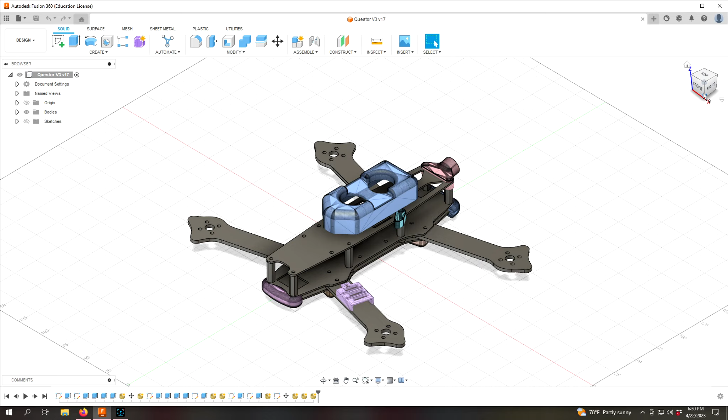Okay, what up YouTube? In this video, I'm gonna hopefully show the process of going from Fusion 360 to actually milling out carbon fiber using a CNC machine.

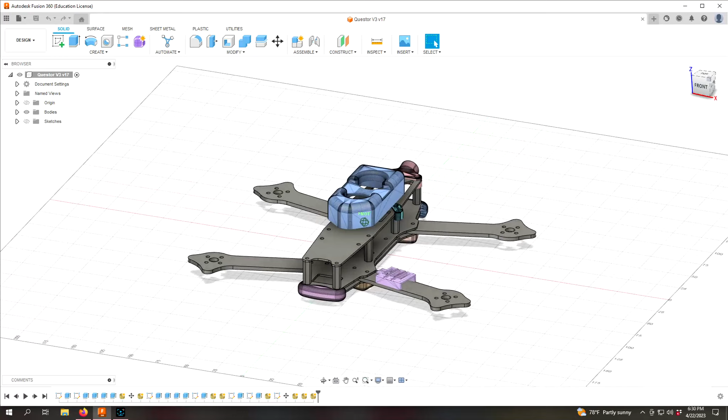This video is mainly gonna be a reference for me because it seems like I don't mess with my CNC machine enough to remember how to do things. So I'm hoping I can document everything in this video and reference it later when I go to machine something out, and hopefully it'll help other people too.

There really isn't too many videos showing the complete process. So right here I'm in Fusion 360 and I have my model that I made of my Questor frame, and I'm calling this version 3.

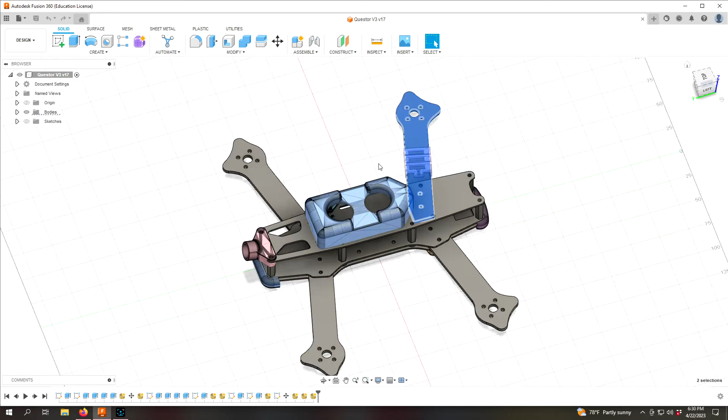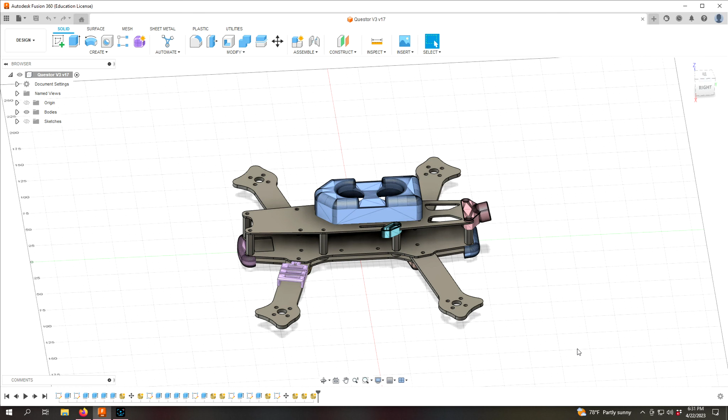Version 1 I never made, version 2 I made, and today I lost it in a pond, and I was planning on making another one, but I pretty much don't have a choice now. I had to make another one. I did make some changes to make it a little more reliable, just minor changes.

I'm still experimenting with the hole tolerances. Truth is, it's been a while since I finished this model, I even forget what I settled on for the hole tolerances. But yeah, still kind of working through that process.

On the top plate here, I cut this design in the back. I don't know if I'm going to regret that or not. The other Questor frame I made had a solid top plate, but I figured I'll cut it, and if I break it, I'll know that's too weak of a point, and I'll make the next one solid.

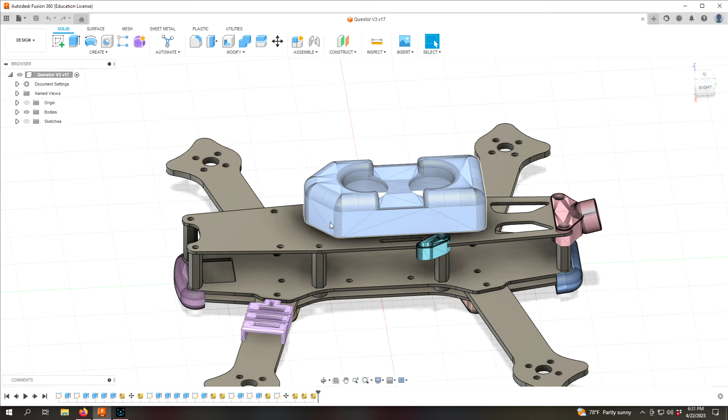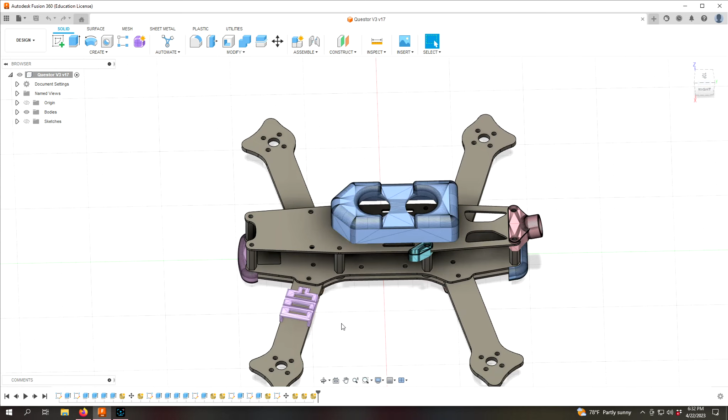My workflow in Fusion 360 is really bad, maybe someone can comment a better workflow. The weird part about this whole process is, even though I had the model in Fusion 360, it seems like the only way I know how to do it is to export it and then re-import it in order to mill it. So let's go ahead and get right into it.

The first thing we're going to do is the top and bottom plates. So I'm going to click the top plate here, and I have my bodies all labeled. So if I go... where is it at?

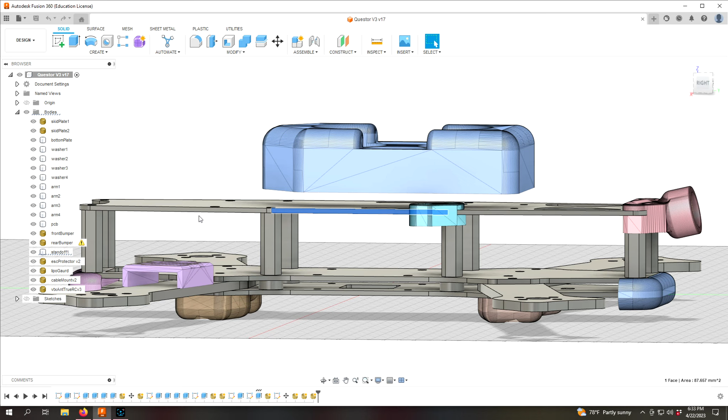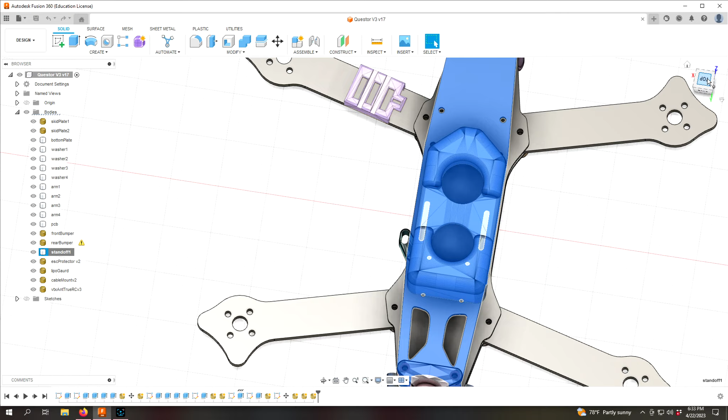Oh, I messed that up. So I messed this model up. Somehow I combined all the standoffs to the top plate. Let's see if I can do this without that. You see, I already messed up my model. Let's see. Somehow combined all the standoffs together. I wonder at what part did I do that. But I think I can still get the contour of the top plate.

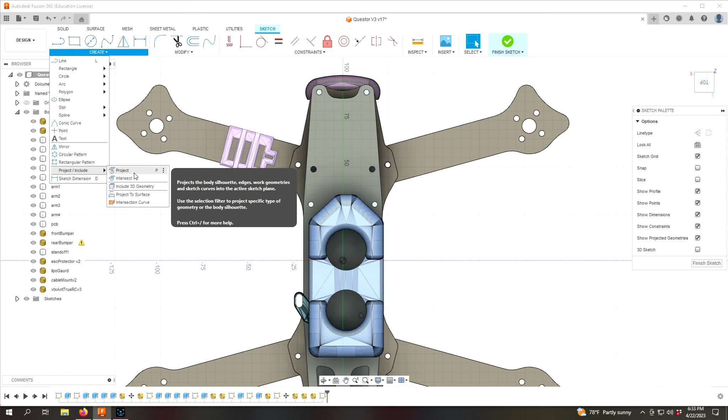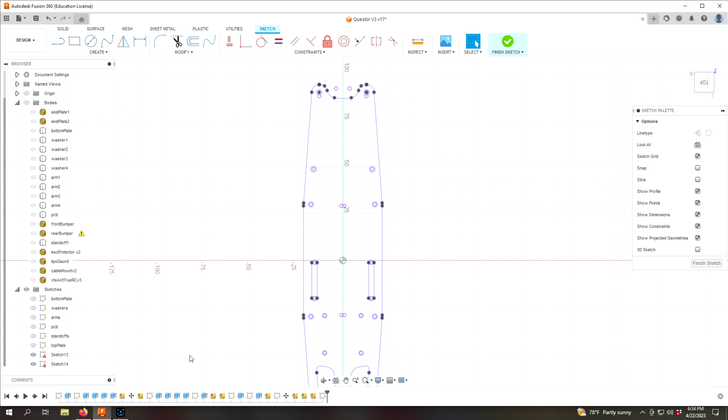Let me do this: create sketch. Then create, project, include, project, click on the top plate, and click OK. Then when we go down to sketches and take everything off... there we go. So now we have a sketch of just the top plate.

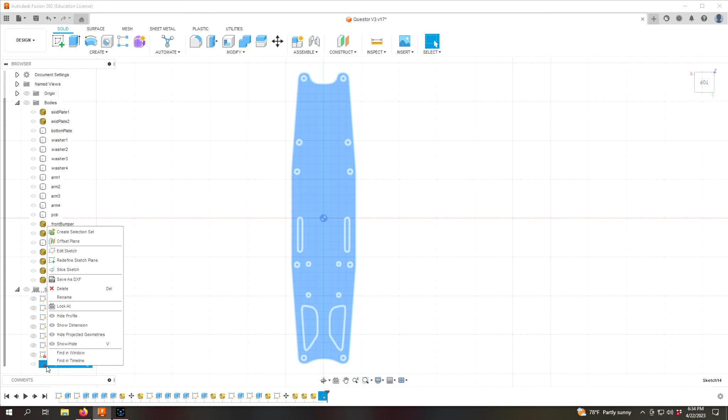So we hit finish sketch, and I'm going to rename it top plate for milling. Then I'm going to click on the sketch and save it as DXF: Questor version 3 top plate for milling.

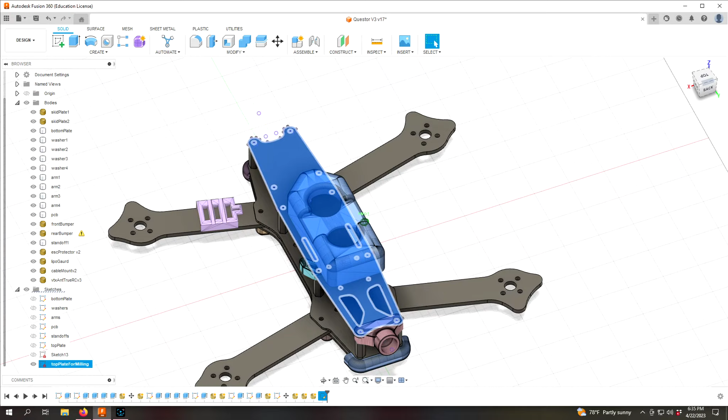And then I'm going to do the same thing for the bottom plate. So if I click this - oh, that's PCB, I'm going to get all messed up. So hide that, click that. That should come up as bottom plate. Yep, so click that bottom plate.

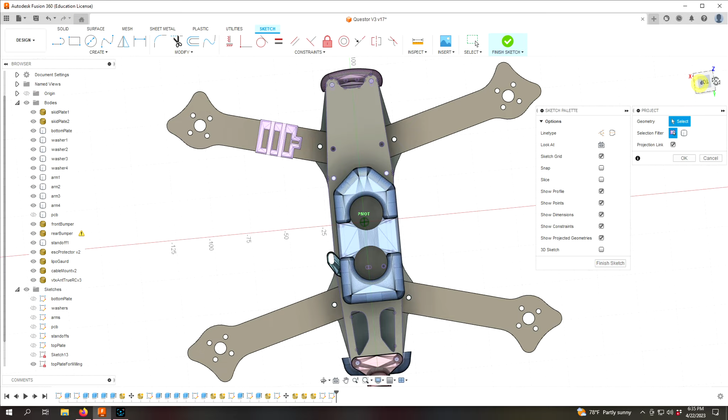Click create sketch. The reason I need to, even though I have sketches labeled bottom plate, is when they're in 3D form, sometimes you end up modifying the contour of it, so you can't trust that. So we're going to do the same thing, a new sketch on the bottom plate. I'll click the bottom plate and project that onto the sketch.

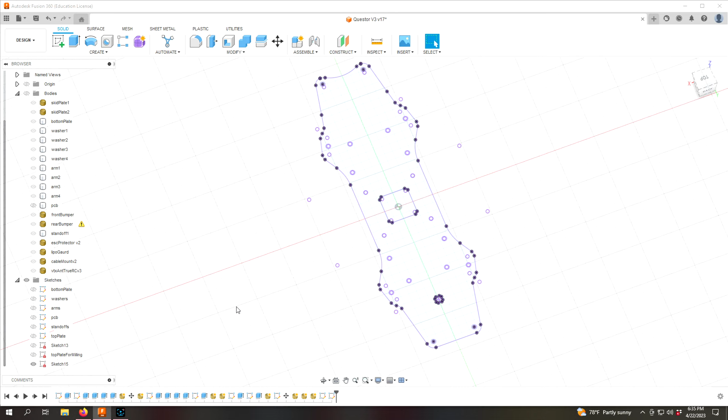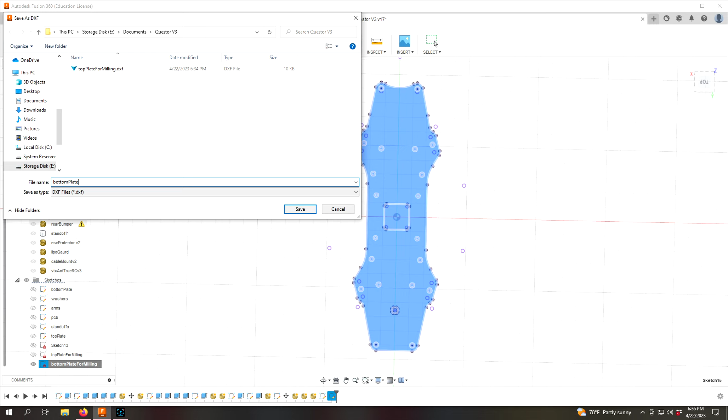And then if I cancel everything out and hit finish sketch, and hide everything except for that - there we go, we have the bottom plate for milling. So I'm going to rename that, rename bottom plate for milling, and we're going to export that as DXF, bottom plate for milling. Like I said, my workflow in Fusion 360 is not the best.

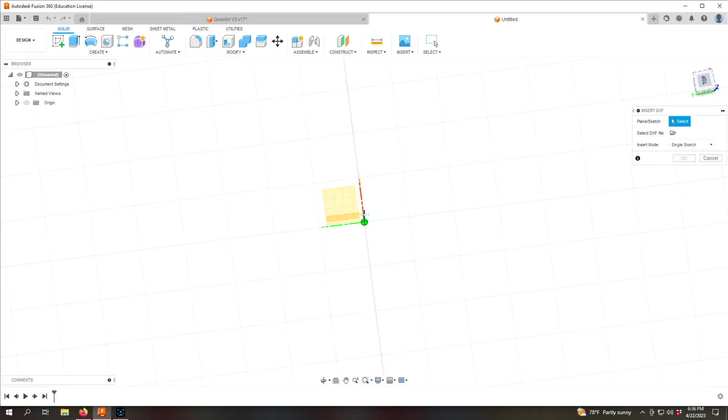Okay, once we save that, we're going to create a new design, and what we want to do is insert those DXFs. So we want to insert it - what's a good plane? I got my planes all mixed up. Right there, top. So we want to insert it onto that plane, DXF file, bottom plate for milling.

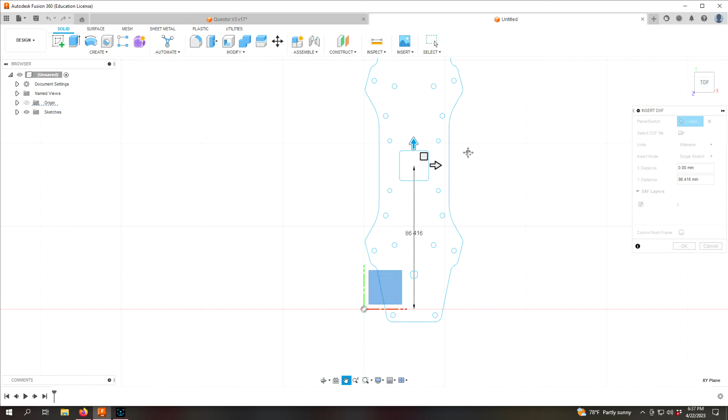And then what I'm going to do is just keep it in the positive axis, just like that. Okay, and we're going to do the same thing.

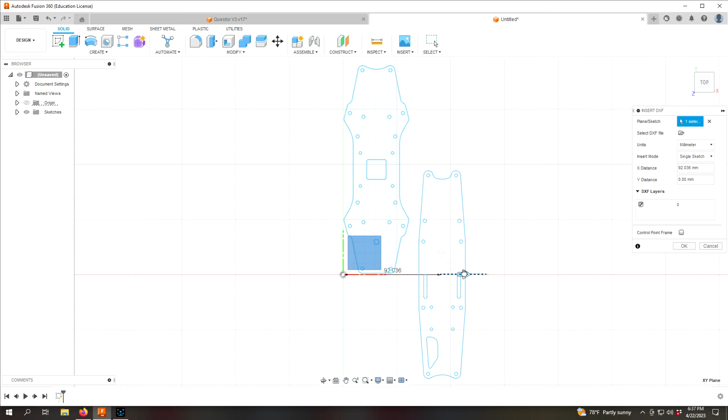We're going to insert DXF, we're going to do top plate for milling. And we're going to do the same thing, go up here. How close can we get them together? We want to make sure we got 2 millimeters in here, we'll do inspect, because the bit I'm using is going to be a 2 millimeter bit.

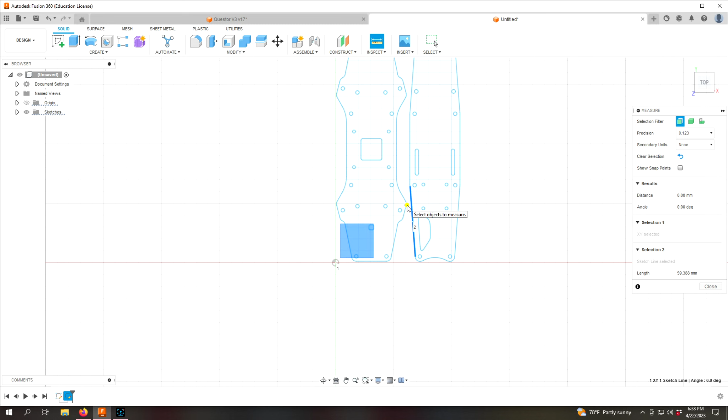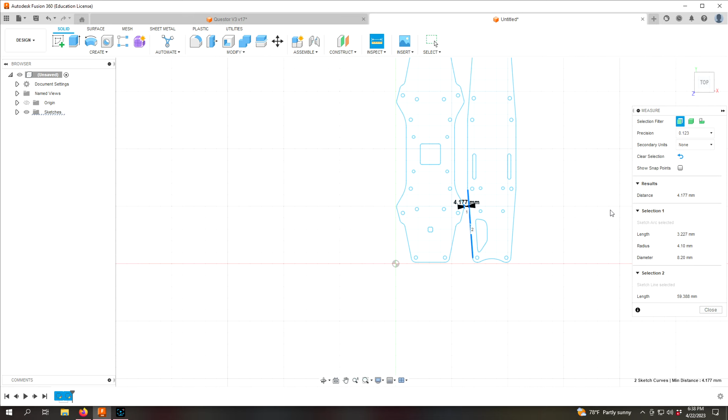How do you do inspect? That's 4 millimeters. Okay, so that's plenty. We can actually move it closer too. Should we move it closer? Try to save some. Oh, too late now, huh? Okay, well that's good. I don't care about wasting material.

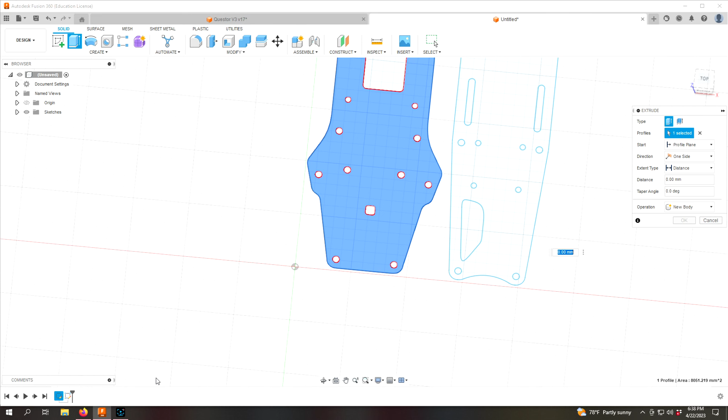Okay, and then just to make things a little easier, I'm going to extrude both of these. Uh-oh, we lost the... Let's go here. Okay, so we're back. I don't know what that was all about. I ended up having to modify the file after I brought it in. It has something to do with, I created this using the one side using a mirror effect, and when you do that, apparently it doesn't like saving it to a DXF, but I have no way of explaining that.

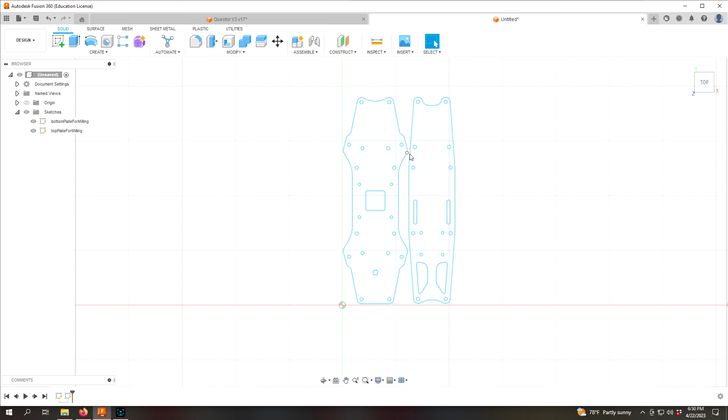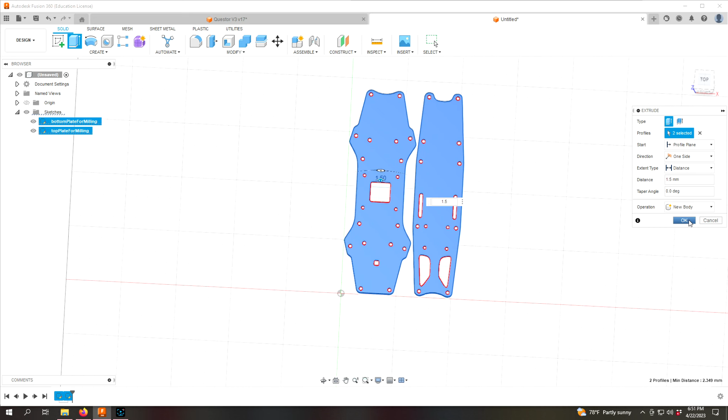So anyway, I have this set up with the bottom plate and top plate next to each other, and I actually made it so that they're 2.5 millimeters apart. So that should be good. The milling bit is 2 millimeters, the one that I'm using. So what I'm going to do now is I'm going to select both of them, and I'm just going to extrude 1.5 millimeters, which is the thickness of the material. So I have this model by itself with both plates side by side, 1.5 millimeters tall.

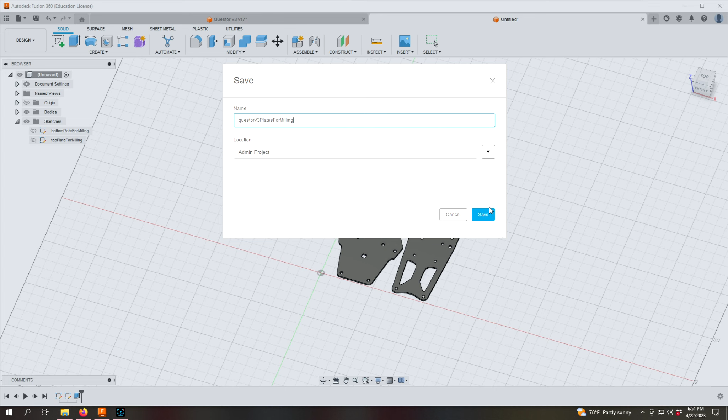Okay, so once we're done with that, let me go ahead and save this. We're going to call it Questor V3 plates for milling. Okay, we're going to hit save. Okay, what we're going to do is we're going to switch from design to manufacture, and we're going to set up, create a new setup, and for machine,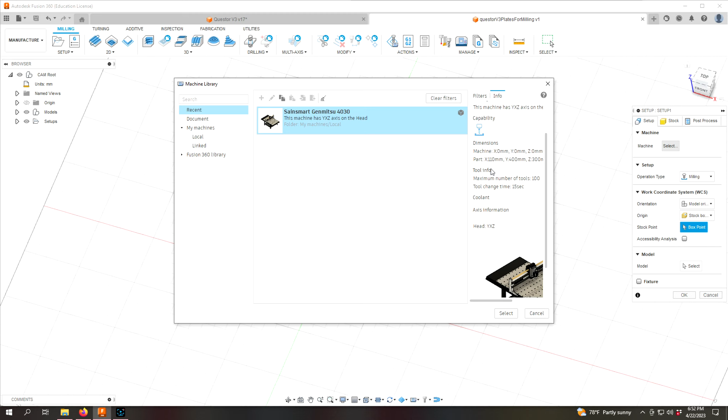I already made this machine, and just to document the information on the machine. It wasn't that hard to input. I think I just selected a generic machine, YXZ axis. I put in the build size, 110, 400 by 300. So the X, Y, and Z is messed up, but apparently this works. So I don't know how I set that up. Okay.

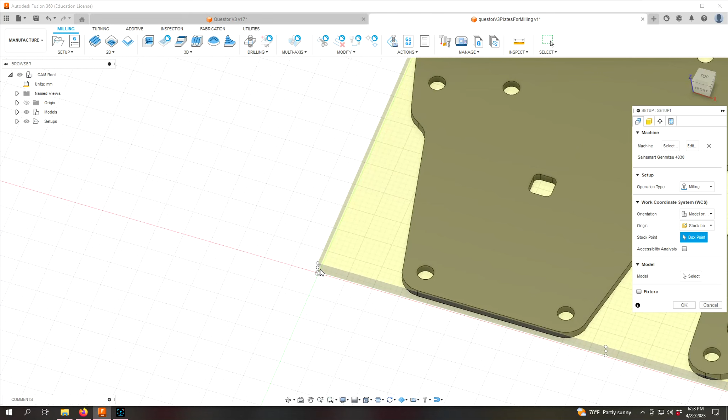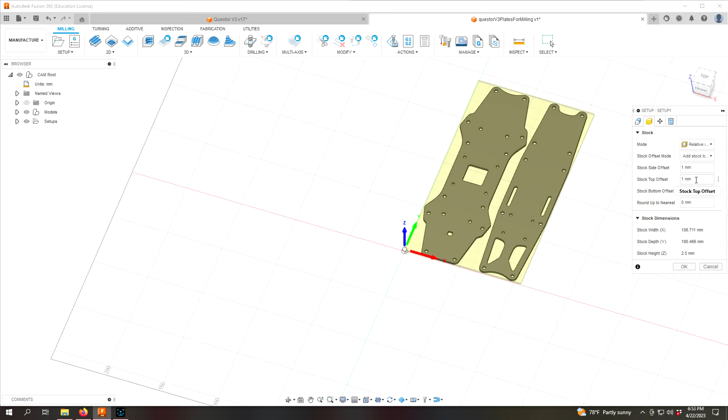So we selected the machine. It loaded the machine, operation type milling, orientation, model orientation, origin. So this homing origin, we want to put it in this corner. So that's going to be our 0 origin. And for the material, I just put it to relative mode. Side and top offset.

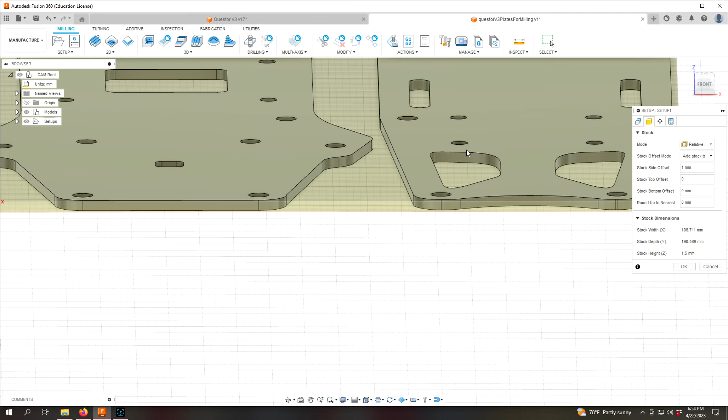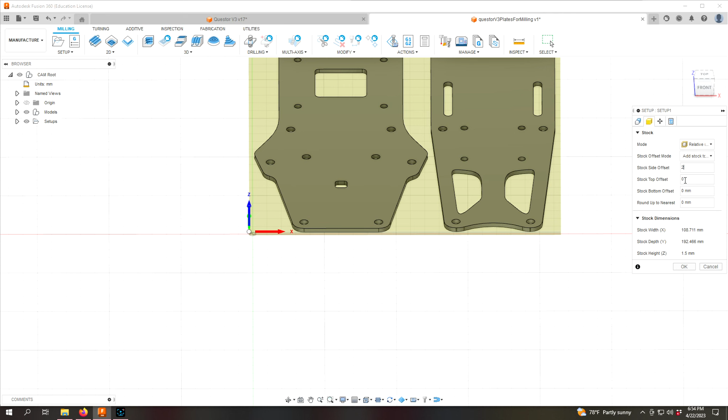We want to get rid of that because side offset is fine for 1 millimeter, but top is really what matters. We want it to be the same thickness, since we know that we're cutting 1.5 millimeter stock. But yeah, having this 1 millimeter, all that's going to do is bring the cutting in 1 millimeter. And actually, maybe I'll do 2 since my bit is 2 millimeters wide. But definitely the top and bottom offset we want 0. And then I think everything else is going to be good.

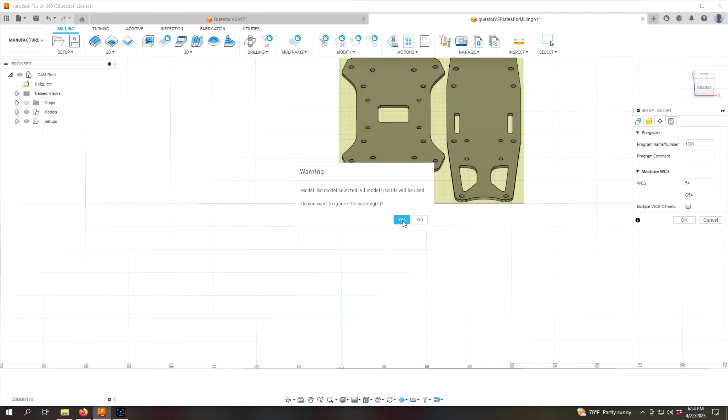Oh yeah, somebody online said that this matters, but I think I might have already inputted it on the machine setup. So we're going to hit OK. Okay. And now we're set up. So once we have it set up, we want to go to 2D contour. Okay, so for tool, we want a local library. I already set up, this is my bit. Now can I edit this?

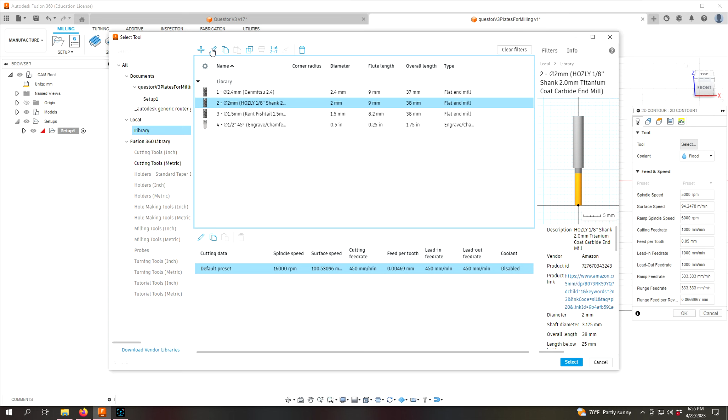Yeah, so I got these bits off of Amazon. They're 2 millimeter, 1/8 inch shank, and I just put the description in there. I already have this all set up. You want to go through this. Okay, so feed rates. So I got my bits and my feed rates.

I consulted Pat Regan. I'll link his YouTube channel in the description. He has a blog post about cutting carbon fiber, and that's why I reached out to him. But the information he gave me through email was different than his blog post, and he said he was going to update his blog post, but he never did. So I'll just link his YouTube channel, not his blog post, but he's the one who recommended the 450 millimeters per minute feed rate for cutting, and then plunge is 100.

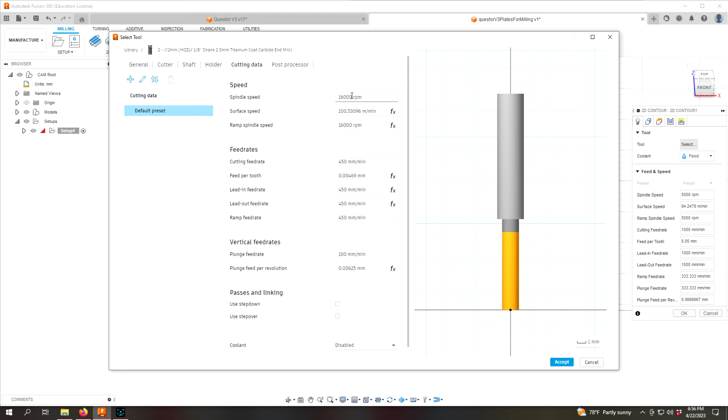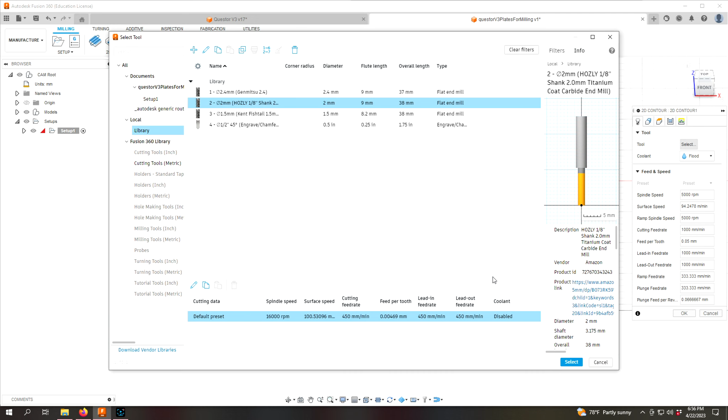And my machine does not control the spindle speed, so you're pretty much putting this in here to help Fusion 360 do calculations, but we don't really do calculations. We just put in the feed rate manually. And oh yeah, coolant disabled. And post-processing, it's been a while, but I don't change anything. So we want to use this 2 millimeter bit, select, coolant disabled, and now we just want to skim through these tabs, and I have notes. So basically, we're not going to change any of these settings because that's for the tool.

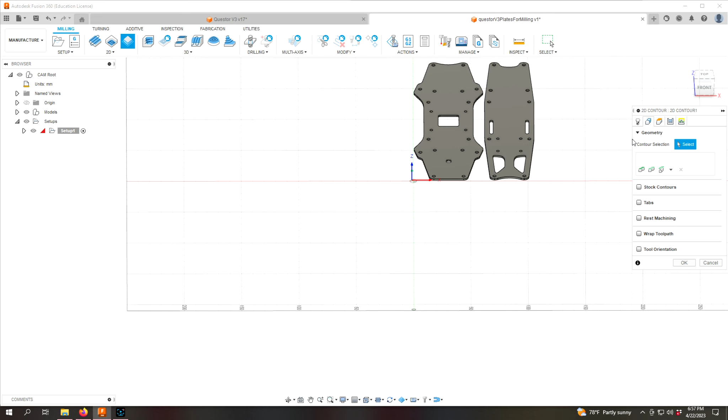So we go to the next one, and the next one we're going to select our geometry. Now the thing is, as you're selecting the geometry to cut out, I'm gonna have it process it so it cuts the geometry out in the same order that I select it. So it's kind of kosher to drill all your holes first. So that's what I'm going to do. So I'm going to start from the bottom here and just select, and I'm selecting the bottom side of all the material. So we're going to do all the holes first.

And hopefully I designed this so that all the holes can be cut with a 2mm bit. The first design I cut for the Vista unit mount on the top plate, I used smaller holes and I had to use a 1.5mm bit, so I had to do a tool change, which wasn't that big of a deal. But I realized that that was kind of overkill. It wasn't really needed.

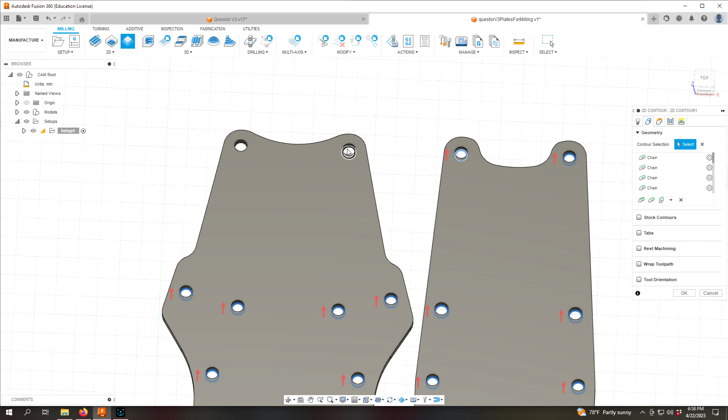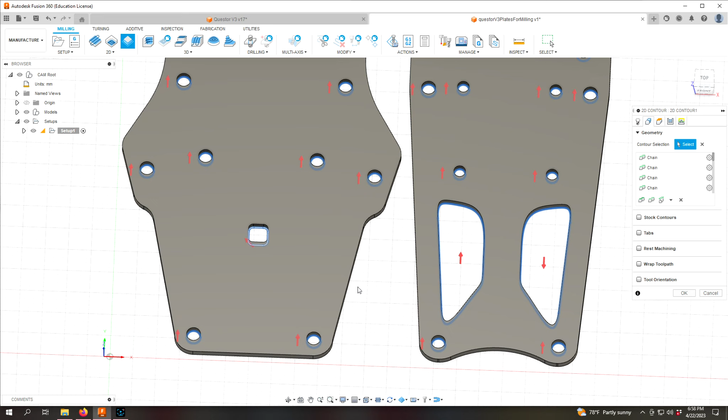So we're going to cut all the holes first. Okay, once we finish cutting the holes, we want to then cut the other stuff that's not holes. So these battery strap slots. And then once we finish that, we want to cut out the whole object. Okay, so we have everything selected. And we are done with this tab.

And then what we're going to do is on bottom height, we're going to go a little extra 0.5 millimeter down into the material, because the way I have it attached with painter's tape, CA glue on the stock, which is what you'll see, there is going to be a little bit of deviation in the cut. So an extra 0.5 millimeter will make sure it cuts all the way through the first time.

Okay, so now in this next tab, this preserve order, we want to check that. Preserve order will cut it in the same order we selected it. And then we want to enable multiple depths. And we want this maximum roughing stepdown, we want it to cut a maximum of 0.5 millimeter each cut. So we're going to cut 0.5 millimeter deep, 450 millimeters per minute. And that's it for this tab.

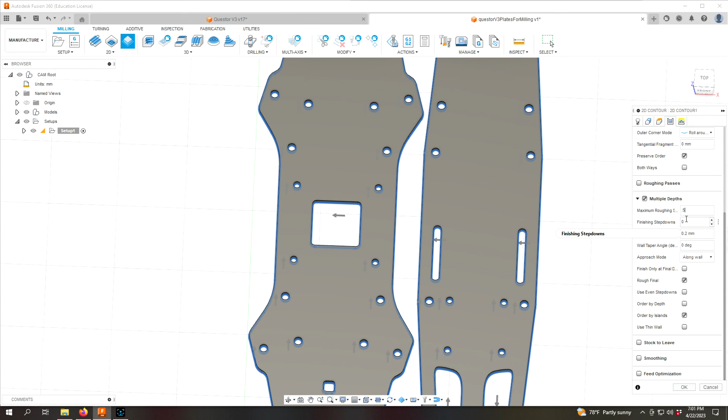And then just to let you know, I was experimenting with this keep tool down. So if you have this checked, when it's done a cut and it needs to go down for the next step, it'll just continue down. If you have it unchecked, every time it plunges, it'll go up before it plunges, and then it'll plunge. I guess that's to help clear the material. I'm going to leave it unchecked because I'm not in a big hurry, so I'll have it do that extra plunge. We're going to do a lead in, and we're just going to keep this stock.

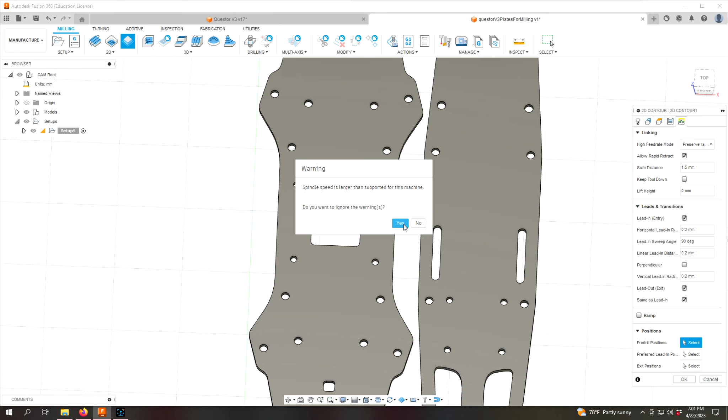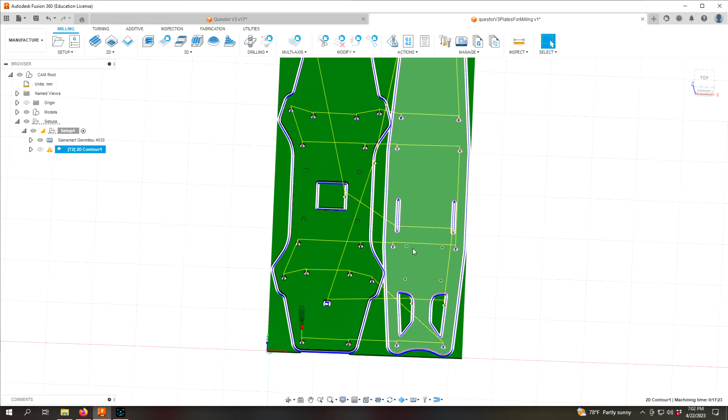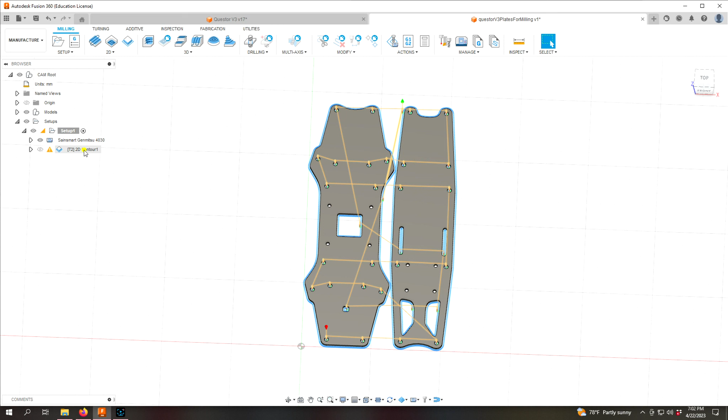And that's pretty much it. So that's all the settings. We're going to hit OK. And spindle speed is larger. Okay, so the spindle speed I don't have set up right, so we want to ignore that. Okay, so it would not allow me to cut out these holes because it won't allow a 2mm bit to cut out those holes. So we are going to have to do a tool change on this job. I could change the file again, but I don't want to increase these hole sizes any more than I have to. So let's go and simulate this, make sure we have it right.

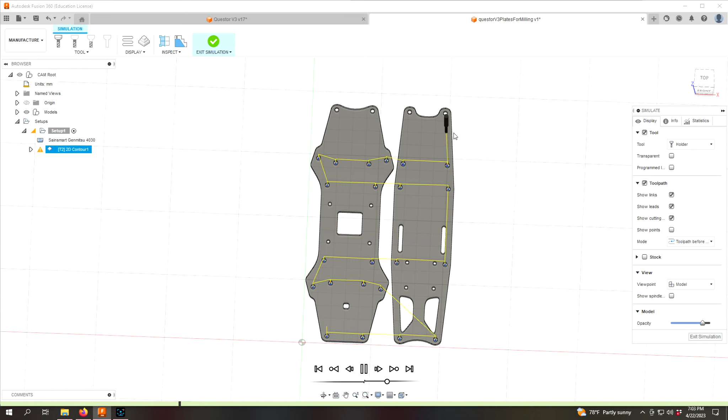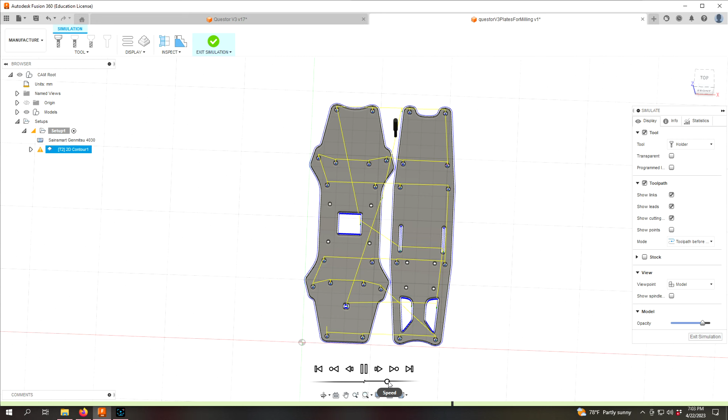You see how it's simulating it? It's cutting each hole. We'll speed it up. You see how it's raising the bit every time for the plunge? And it's doing 4 passes every time because it's a 1.5mm of material and then 0.5 millimeter finishing cut. Okay, so that job looks good. So we want to exit simulation and we want to do another 2D contour.

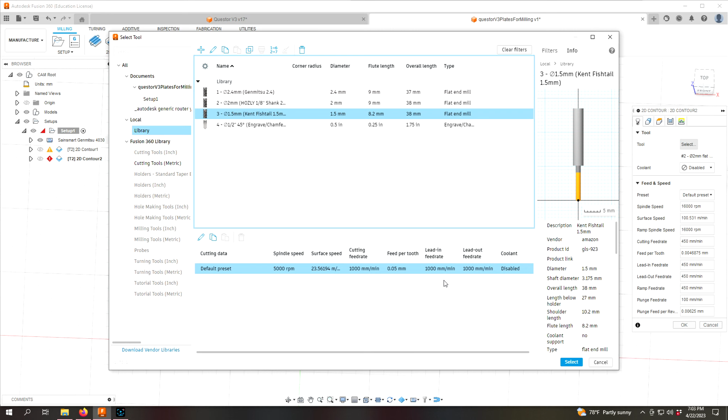And for tool this time, I do have 1.5mm bits. So in my library, I have these 1.5mm Kent fishtail bits. And I don't have the feed rate set right. So we're going to select it. And what we're going to do is I want to make sure I disabled. Okay. Cutting feed rate, I'm going to go 450. Lead in feed rate 450, 450, 450, and plunge feed rate 100. So I had to change that just because I didn't have my tools set up right. So that should be good.

Okay, now we want to check the holes that it couldn't cut. Let's see, we'll start here. This one. This one. This one. This one. This one. This one. This one. This one. Okay. And we're going to go to the next one. 10, 5. Change this to 2. And change this to negative 0.5.

And then all these 450, 0. We want to preserve the order once again. We want to do multiple depth passes. We want to change this to 0.5. And then the final tab, we don't want to do keep tool down.

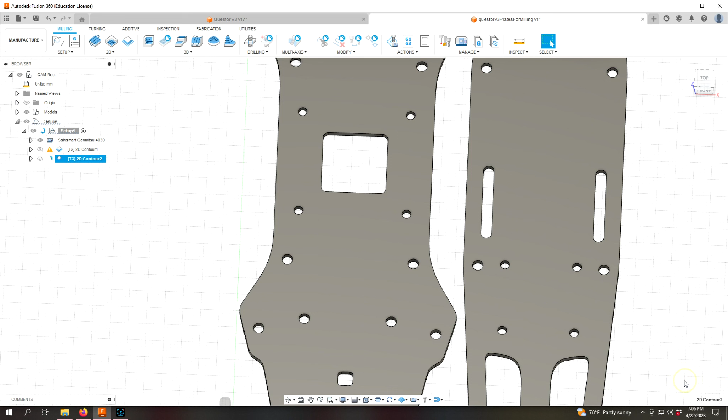I have these changed to, what, 1/10 of the width of the bit. I don't know if that's done on purpose or not. Okay, we're going to hit OK. It's going to render it, and then we're just going to simulate it again just to make sure it doesn't do anything crazy. Simulate. Okay. So exit simulation.

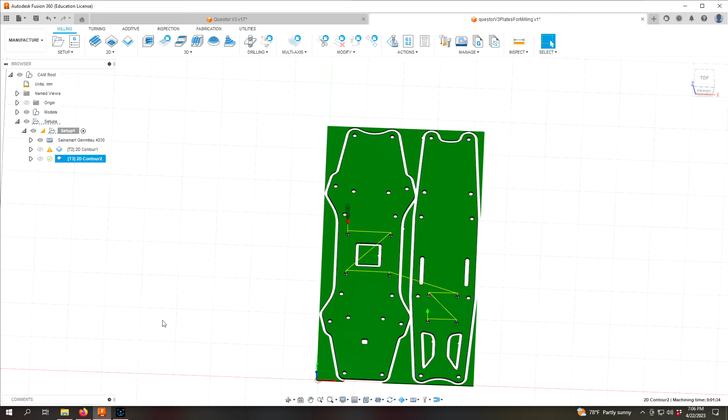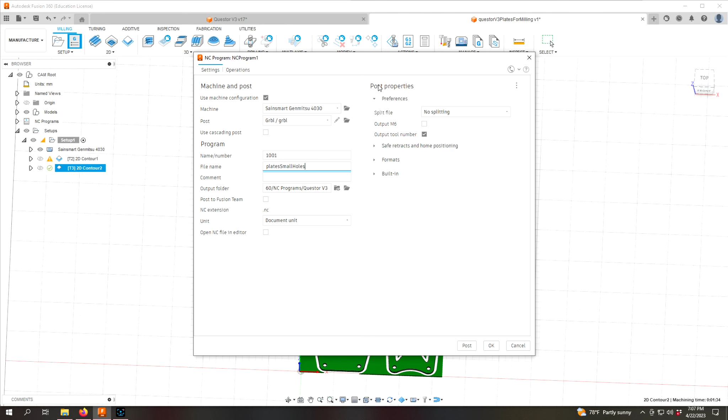Okay, so what we want to do is we want to export these now. So we want to right click and hit create NC program. And then NC program. So I'm going to create a new folder just for this project to help keep me organized. Select folder. And we want to name this, what do we want to name this? We want to name this plates, because it's both bottom plate and top plates. I'm gonna name it small holes. And we're gonna post.

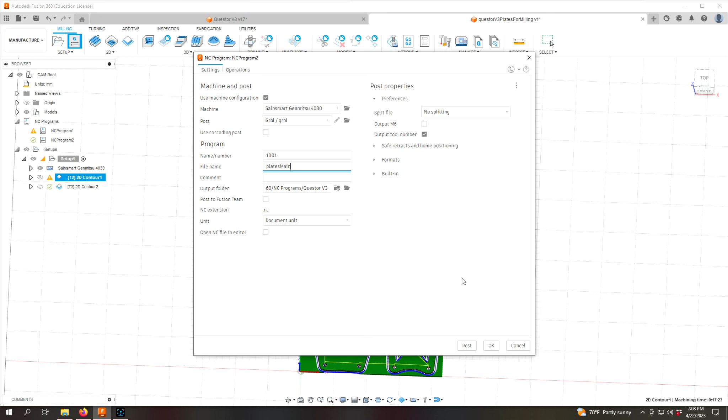Okay, and then we're gonna go to this other one, create NC program, file name, we're gonna name it plates, main cut. We're gonna post it. Okay, now we have successfully posted, so we're gonna go outside and go in the shop and start cutting this with a CNC machine.

Okay, so what I do is I use an additional spoil board because I don't want to use the board that I have set up on my CNC machine. So I put down painter's tape on this sacrificial piece of MDF, coat the whole board, and I also coat the whole carbon fiber sheet with painter's tape. Then after that I put CA glue, and I also use accelerator. I have done this before without accelerator, but accelerator does really speed up the process. And I stick it on the spoil board.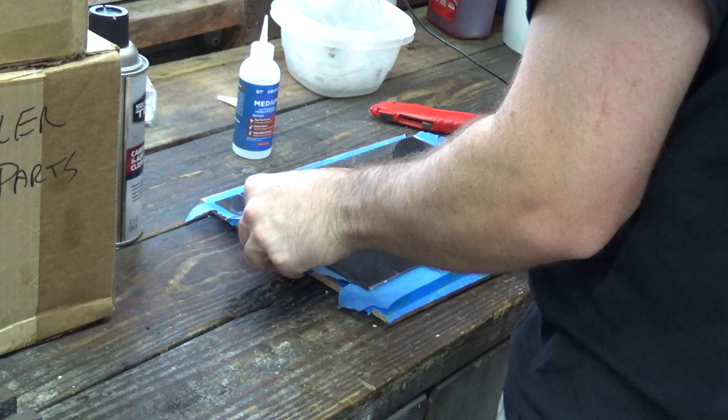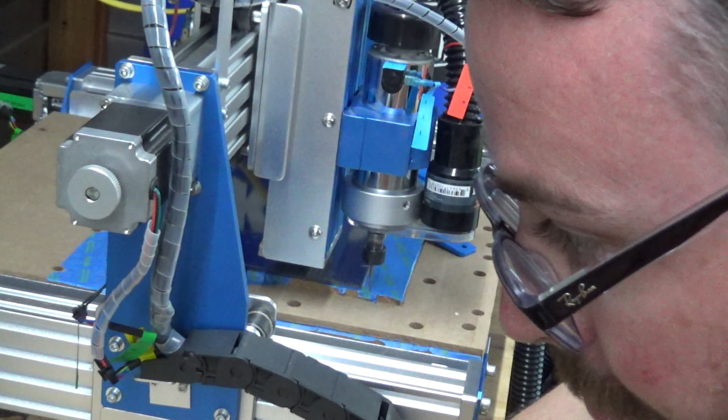Now, what I'm trying to do is I'm trying to get it lined up square with the spoil board, because the actual spoil board on my CNC machine has lines in it to help line it up square. And what I'm doing here now is, after I secured it to my CNC machine, I just ran one axis of the CNC machine to make sure that the actual carbon fiber sheet was square with the CNC machine, so the CNC machine wouldn't accidentally cut off the carbon fiber sheet.

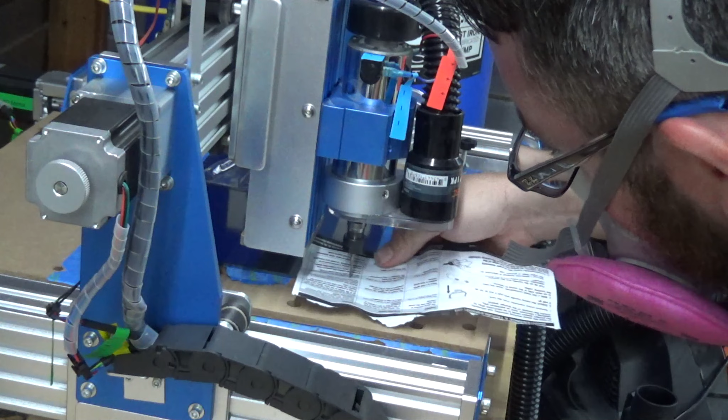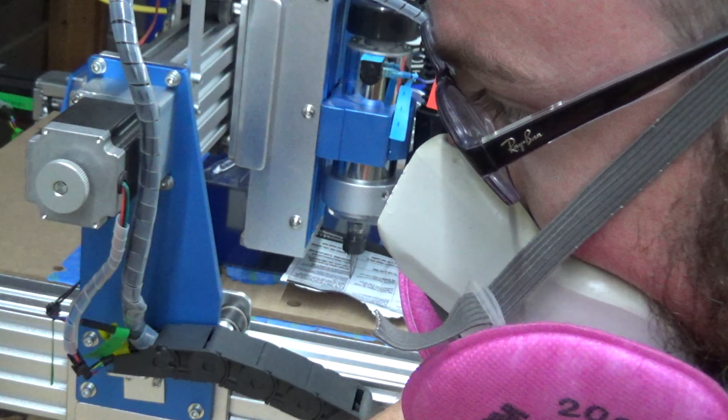Now what I had to do is I had to set up my XYZ home. So X and Y home is set up differently than your Z home. So as you remember, the origin we put in Fusion 360, I'm setting up the bit to be at that origin. Now I'm homing the Z axis. I do have a Z probe, but I don't think it works that well, so I just use a piece of paper to set the Z home. So now that I got everything homed, I can go ahead and start cutting.

Now the first cut I did was for the 8 small holes using a 1.5 millimeter bit, and that's what's happening now. As you can see, I'm using the dust shoe and a vacuum cleaner, and I have no problems with dust. I do wear a respirator still, like a P100 respirator, but the dust is not a problem at all. Okay, so now that I'm done drilling those 8 holes, I gotta do a bit change, so I put the 2 millimeter bit in.

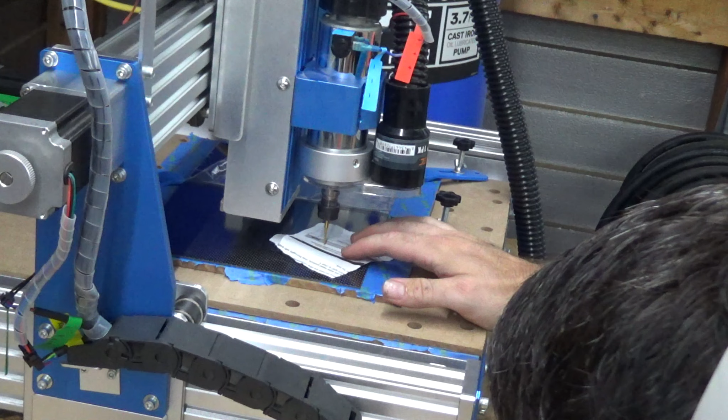Now, I don't touch the XY home at all. You got to leave the XY home the same. But since you change out the bit, you do have to do a Z home. So that's what I'm doing now, is I'm rehoming the Z axis. And it's very important you don't touch the X and Y home, or you don't shift the machine at all when you're doing the bit change, or you're going to have a failed machining. But after you reset the Z home axis, I can run the main cutting profile that will cut all the remainder of the cuts.

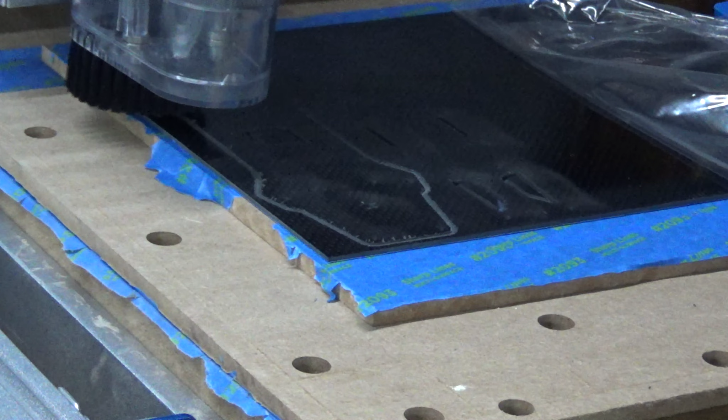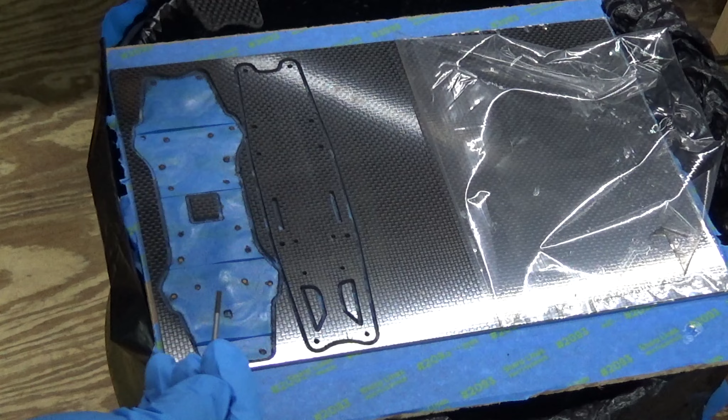And when I was getting into this, I was real afraid about dust, and I was trying to think about how to cut it under water. But I had a hard time figuring out how to easily cut carbon fiber underwater with a tray. But just using a dust shoe, and I have a HEPA filter in my vacuum cleaner. That's real important. There's no problem with dust at all. So the job's done. I vacuumed it off, and as you can see, I'm just lifting it. And as you can see, that 0.5 millimeter cut into the spoil board was perfect for all the painter's tape.

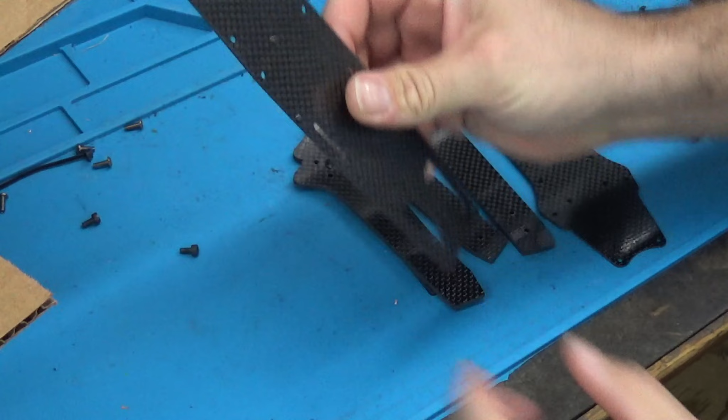Then I just take sandpaper around the edges, there is a little bit of sharp edges. It's not too bad, but just take some high grit sandpaper and just run around the edges. And as you can see, I'm feeling it to make sure there's no places where you'll get cut. And that's it. Oh yeah, after I sand the edges down, I do wash the carbon fiber off to make sure all the dust is gone. But yeah, I'm just inspecting it, and that's pretty much it.

Once you know how to do it, it's not that big of a deal to cut a carbon fiber frame. And now I'll never worry about being out of parts or out of bottom plates, breaking a bottom plate, not being able to get it, because I make my own.